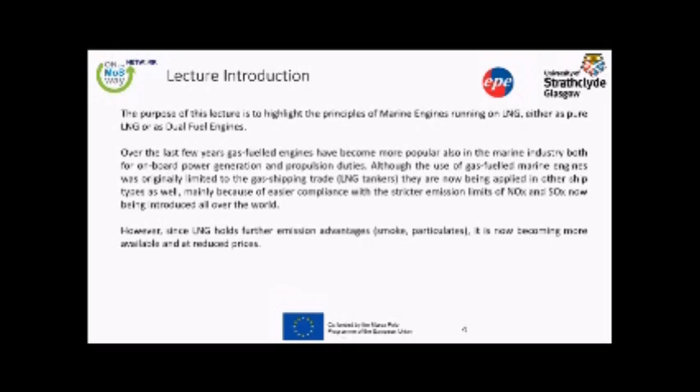A very brief introduction in LNG. I'm not going to repeat the basics of LNG that were presented in the previous lectures and also today by Ms. Damianidou. I'm going to focus on what LNG is, how it performs within the engine cycle, and how it is to be used as marine fuel.

Everybody knows that LNG stands for liquefied natural gas. It's a natural gas that is cooled down to approximately minus 163 degrees at atmospheric pressure, and it is transported as a liquid in order to achieve economy of scale and easiness to transport the amount of LNG. It is now rapidly becoming a widely used engine fuel, in association with its growing popularity as an energy source worldwide.

Let's now discuss LNG on board. We assume everybody is familiar with how LNG is produced in the refineries and how it is transported. Whatever I'm going to say stands from the point that LNG is on board the vessel and ready to be directed to the engine.

There are two distinct ways of producing gas from LNG, depending on how it is extracted from the tanks: natural boil-off gas and forced boil-off gas. Natural boil-off gas means we are taking off the top of the LNG tanks above the liquid, and this gas is used as a burning fuel. This particular part of the LNG cargo has a high methane content and some nitrogen particles, giving a very high knocking resistance.

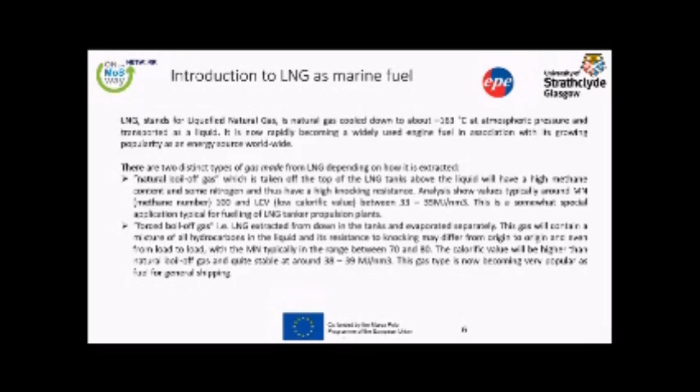The knocking stability of LNG as marine fuel: as we said, the natural boil-off gas from the top of the tanks is very high in methane and has good knocking stability. It is therefore particularly well suited as an engine fuel.

However, when a propulsion system is set up to use this type of gas, it is important to ensure that there is always enough natural boil-off gas with sufficiently high methane content available, so that there shouldn't be any need for mixing in forced boil-off gas from the bottom of the tanks. What does it mean? It means that in order to use boil-off gas, we need to have large capacities of this type of gas in order to avoid mixing with the liquid form of the gas.

This is the reason why we use this method on large LNG tankers, that are carrying huge amounts of LNG, and they do have plenty of boil-off gas quantities to be burned in their engines.

Engine installations that are specifically designed to be fueled by LNG should preferably use the forced boil-off type, with the LNG taken from deep down in the tanks and then well mixed before extraction into the evaporator. This methodology will ensure good homogeneity of the LNG taken out, and hence constant gas quality.

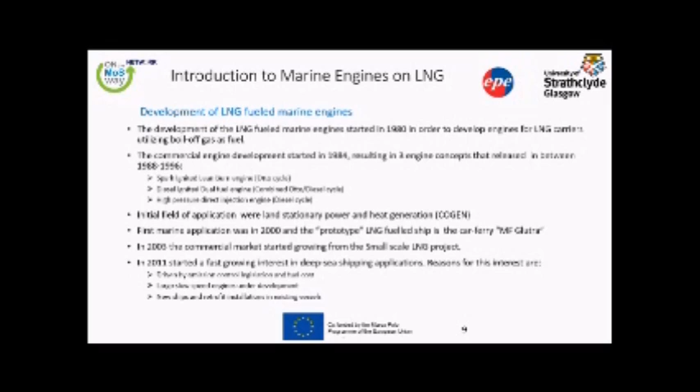So let's go into more detail, keeping this as an introduction, to the types of marine LNG engines previously identified. As described, three main types of LNG-burning engines are available to the marine industry, coming from different development directions and hence with some different characteristics.

The first type is the spark-ignited LNG-only engines, first developed for the land-based power industry, which has major requirements but also needs simplicity and good overall performance at lowest total emissions. These engines depend on permanent gas supply and initially came into the marine industry as engines for short distance ferries. The spark-ignited LNG-only engine should be applied only with LNG; we cannot use it with any other type of fuel.

The diesel-ignited gas engine with dual fuel capability was also originally developed for land power plants, and has the ability to operate both on liquid and gaseous fuels at high specific power, which is a particular advantage.

So I think we can continue with the description of the three types of marine LNG engines. We described the spark-ignited LNG-only engine, and now we are talking about the diesel-ignited gas engine.

This particular engine has a dual fuel capability. Initially, it was also developed for land power plant use, where its ability to operate both on liquid and gaseous fuels at high specific power was a particular advantage. Development was originally focused on low NOx emissions at high load; however, a focus is also on part load performance and variable speed capability. The diesel-ignited LNG engine is the first type to establish itself in the maritime industry and is currently the dominating engine type in this market.

The direct gas injection diesel gas engine is the third type of marine LNG engine, and initially came to use in the offshore industry, where its high flexibility and very high power density is of prime importance and attraction. The concept is unique, imposing no particular requirements on the self-ignition stability of the fuel gas, and its diesel operating principle ensures that the combustion of the gas fuel is very complete.

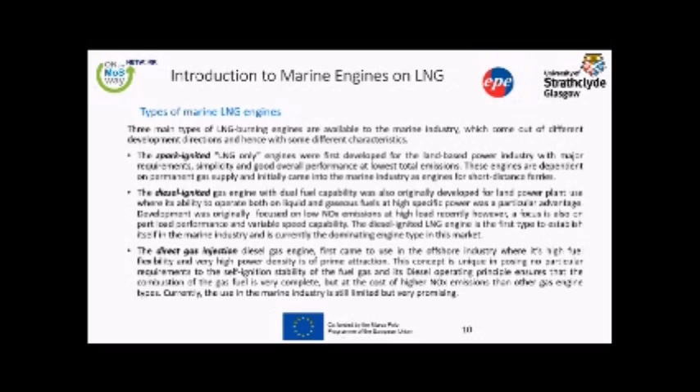The gas burning engines, regarding the principles, we have two different principles as stated: the premixed Otto and direct injected diesel cycles.

The Otto gas engines include the gas-only spark ignited engine and the diesel ignited gas engine. For the first one, we use either the typical well-known carburetor or port injection of gas. Those are single fuel engines, and therefore they must meet special redundancy requirements in order to be used on board vessels for marine applications in principle.

The diesel ignited gas engines have a conventional low pressure gas feed as above, but they have an ignition principle by injecting a certain quantity of diesel fuel, also known as Otto dual fuel, or low pressure dual fuel principle. This type of engine will always need a certain quantity of diesel fuel to be burned with the gas in order to run in gas mode.

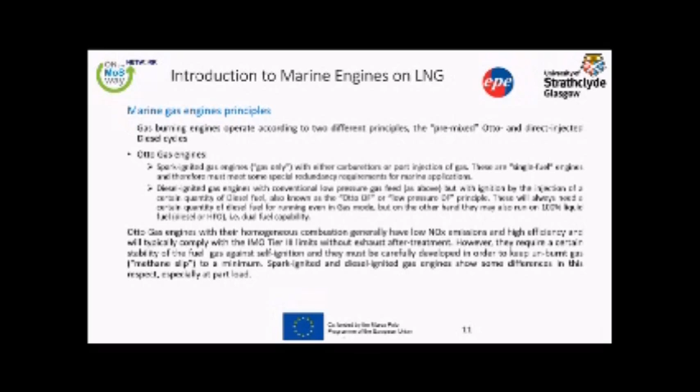The diesel gas engine is the engine where the gas is directly injected at high pressure into the cylinder after the diesel pilot fuel has ignited. We call this type of engine diesel because in principle it follows the diesel burning principle, that is, we spray fuel directly in the combustion chamber without any further spark ignition source. This is also known as the diesel dual fuel principle, or the gas diesel principle, and such engines also have dual fuel capability and may also run on 100% liquid fuel, either diesel or heavy fuel oil.

The diesel gas engines have a diffusion burning which ensures good capability of burning gases with low stability, that is a low methane number, and at the same time they are producing low methane slip emissions - we are avoiding the methane slip.

However, this type of engine does require a high pressure gas system, typically in the range of 250 to 300 bar, and we also need additional exhaust after treatment in order to comply with IMO Tier 3 NOx emission limits. So on one hand, we have a simpler methodology of burning the fuel. On the other hand, we need to establish on board a high-pressure LNG system that can treat the fuel before entering the engine, and we also need to take other measures in order to comply with IMO Tier 3 emission limits.

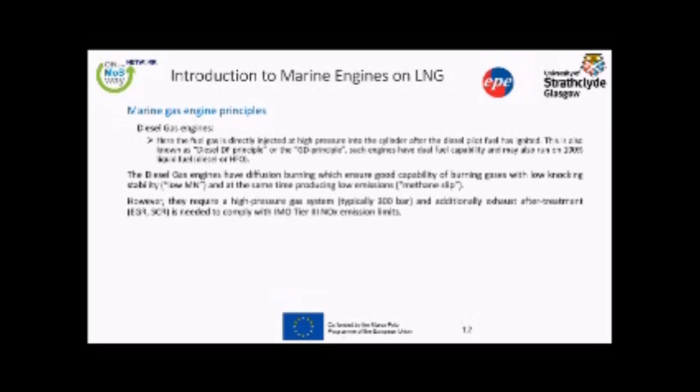Starting with a spark-ignited lean burn gas engine. Just for reminder, this is an LNG only use engine. No other fuel can be used on this type of engine. We are using low pressure gas supply in the region of 4 to 5 bar, no more.

This engine can display a higher efficiency at high load, higher than the corresponding diesel type of engine, but the ability to take partial loads is lower than the other type of engines. We do have low emissions that they can meet Tier 3, IMO Tier 3. They are very sensitive to gas quality. We need gas with a high methane number, and we need a constant supply of this gas.

Otherwise, the engine may present some hiccups in operation. This type of engine is not suitable for retrofitting of any existing engines. We are talking only about new engines, not about retrofitting engines with this type of gas burning principle.

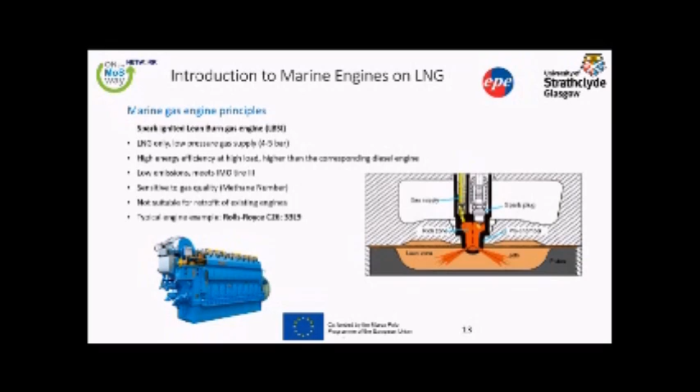The second type of Otto principle engine is the diesel-ignited dual-fuel engine. In this particular engine, as already stated, we have a dual-fuel capability, LNG and any type of diesel fuel. We have again a low gas pressure supply between 4 to 5 bars. This engine also presents a high energy efficiency at high load, and on top of that, it can display a better ability to undertake partial loads than the LNG only fuel engine, the spark type of engine.

It can meet the IMO Tier 3 emissions. There's a flexibility in fuel mix. We can design the engine with a design point according to our needs. We have no strict limitations on that.

It is also sensitive to gas quality, to methane number, but not as sensitive as the previous type of engine. It is a good opportunity and a good selection to retrofit existing engines with this principle, but please bear in mind that this displays an extensive rebuild of the engine, and this will be explained better tomorrow and the day after tomorrow by Wärtsilä and MAN.

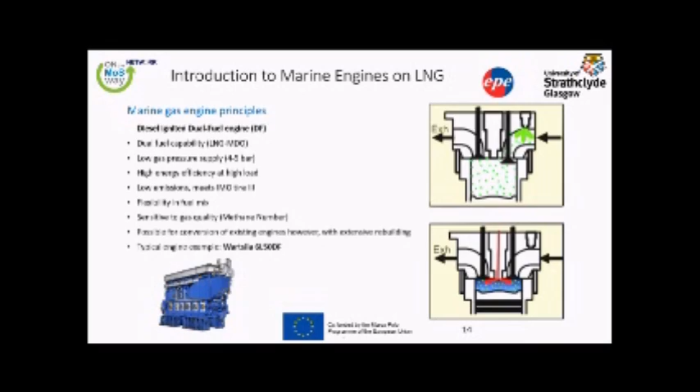For those two types of engines, just for clarification, I repeat that these type of engines are described as Otto cycle engines. That is for the lean burn combustion and the dual fuel. You can see a typical burning diagram where in the horizontal axis we have the air-fuel ratio, and in the vertical axis we have the mean indicated effective pressure, the thermal efficiency, and the NOx emissions.

You can see that we can select the design point as the optimum performance for all cylinders, well away from the knocking and the misfiring area of the fuel, and within the operating window we can achieve very low NOx emissions, almost insignificant amounts. A typical air-fuel ratio for this type of engine stands between 2.1 and 2.3. And you can see that the efficiency is well within the operating window, well situated within it.

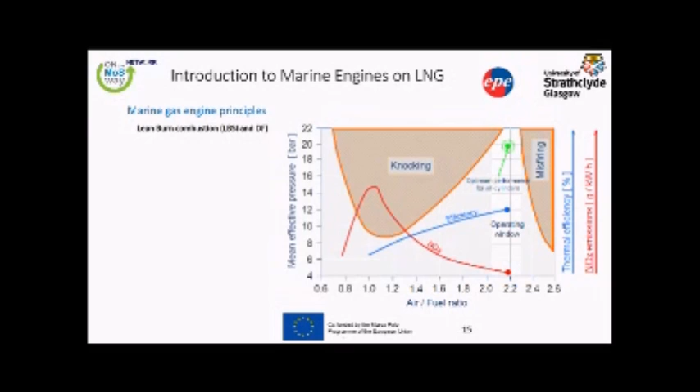The other type of engine is the direct gas injection. The direct gas injection is a high pressure engine. It uses the diesel principle, and in this case we don't have any spark source. We are using gas in high pressure, that is between 250 to 300 or even 350 bar, depending on the manufacturer. We can use this type of burning in both 4-stroke and 2-stroke engines. We can also have a multi-fuel capability, LNG and other type of marine fuel engines.

However, we cannot meet the IMO Tier 3 emissions. That's why we need additional reduction techniques regarding NOx emissions. This type of engine is not very sensitive to gas quality. We can use an LNG that has a lower methane number than the previous engines.

We do need onboard separate and dedicated installations in order to pump and compress the LNG to 350 bar and evaporate it in these conditions. It's not a big deal, it's a simple process. However, we do need a dedicated area on board the vessel, and this should be taken into consideration while designing such systems. This engine has also flexibility in fuel mix, and we are talking about retrofitting existing engines with this principle, and the retrofitting is a simpler conversion than the diesel ignition engine, and this is also attractive for deep sea shipping.

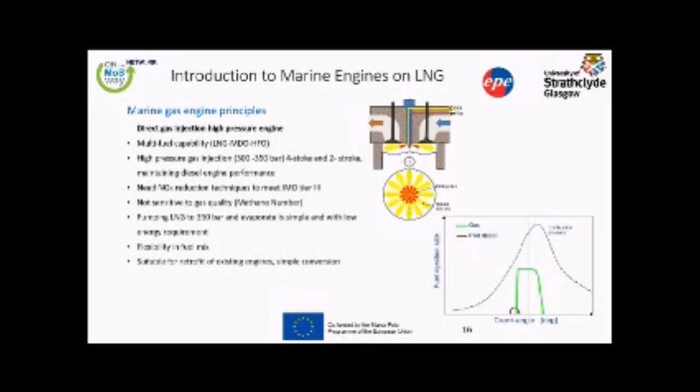Coming back to what has been described before, the deep sea shipping and marine industry is now starting to look at LNG applications, taking into account that the majority of deep sea vessels use two-stroke engines. This type of LNG-burning engine seems quite attractive to ship owners. A typical example is the big engine from MAN Diesel, the ME-GI models, ranging from G40 to G95. The G95 is a huge engine specially designed for very large crude carriers, developing very high power from a single engine.

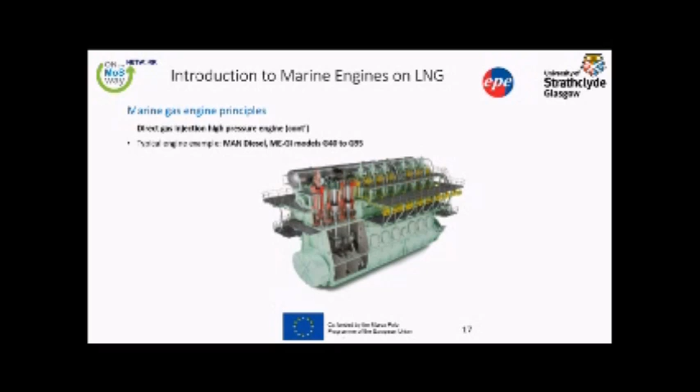More details will be displayed by MAN during their dedicated presentation. In these slides, I have gathered all three different operated engines in one picture for your convenience.

Let's start with the lean burn spark ignited engine. Again, it is LNG only, and it works like the typical gas engine in our cars. The gas enters the combustion chamber, the piston compresses the gas, and then we have an ignition source in the form of a spark, followed by ignition, and the cycle continues with the piston and the gas exhaust.

The dual fuel gas engine, operating under the Otto principle, is a little bit different. We again have the entrance of gas into the chamber, and compression of the gas. During compression to the upper limit point, for those who know the mechanical principles, we have injection of fuel, and the role of the spark is played by the fuel, the normal fuel, and then we have ignition of the gas.

The third type of engine, the pure diesel engine, uses high pressure gas injection. That is, we inject gas at very high pressure and burn it the typical way. Everything in the fuel is being burned within the two-cycle engines.

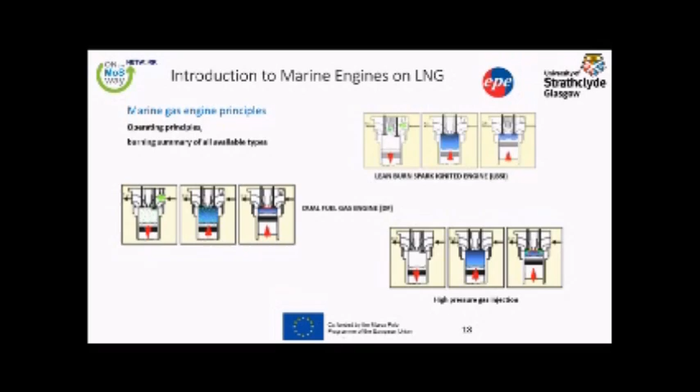So after finishing this, and just to repeat, I want to make it quite clear: this was just an introduction to the methodology, design, and types of marine engines available for running on LNG. We are going to have two full days with the major engine manufacturers, Wärtsilä and MAN, and they will address every single point regarding the technology of these engines. So this was just an introduction for you to have an initial picture, and in order for you to be able to follow tomorrow and the day after tomorrow what is going on.

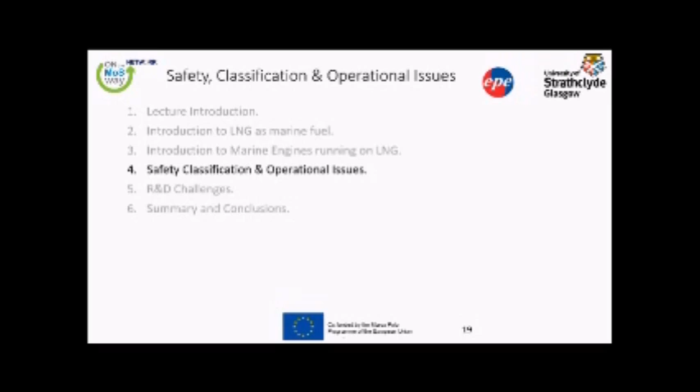Let's go now to some safety, classification, and operational issues evolving around the engines. Classification issues - of course, as you may understand, this is a very large topic, and we can make only some general statements in this lecture. First of all, let's see what IMO is doing, because IMO is formulating the principles that we are going to revolve around regarding LNG.

IMO has developed the IGF, the International Gas Fuel Code, which is based on the interim guideline MSC 285 of 2009. The latest news is that IMO finally concluded on the final draft, which was released in June this year, and it is expected to come into full force in January 2017, about a year from now.

The IGF is a standalone code, not part of SOLAS or any other legislation, and this code addresses all technical issues regarding the use of LNG on board as fuel, not as cargo. This is very important for you to clarify - IGF deals with LNG as fuel, not LNG as cargo.

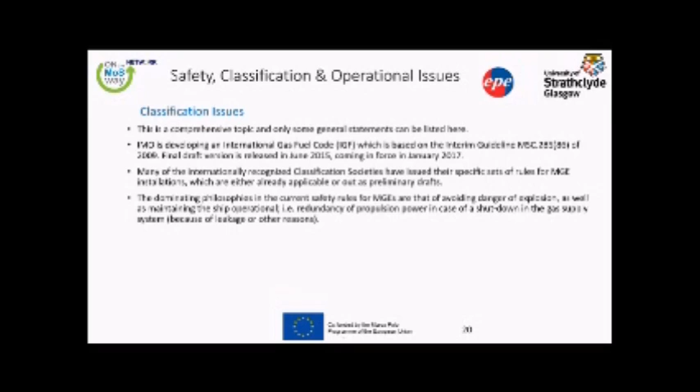Safety issues - again, we have a lot of points for discussion here. The IGF and the Classification Society's guidelines are addressing all the issues applicable at the moment. And from my experience, I can tell you that we are constantly adding new points for further consideration regarding safety and proper design.

However, if we focus now on the engine room itself, and let's say we don't care for the moment about other LNG applications on board, if we limit our interest to the engine room, when designing the engine room for a dual fuel installation, we need to address a couple of issues. The first of these issues is how to prevent any kind of explosion.

In order to establish explosion prevention, we use 2 main options. Either we should have a double-wall gas feed piping to the engines, and this type of piping should be provided with venting of the space between the inner and outer pipe walls to a gas detection system in order to be alarmed in case of leakage,

or place the engines in a separate gas-tight and ventilated engine room, which has its own gas supply, required number of air exchanges per hour, is well protected with gas sensors, and has required pressure relief and escape ducting, and all the other measures already addressed in the IGF or in the class society's guidelines.

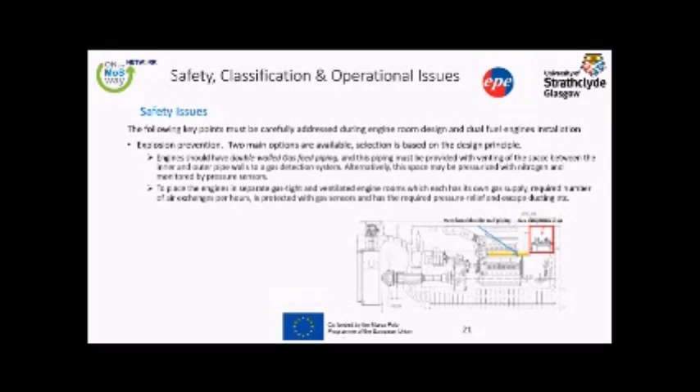A second point regarding safety issues is, of course, to use electrical equipment categorized as Ex-proof for obvious reasons, to design a dedicated ventilation system just for the LNG installation, equipped with a separate emergency relief system, and this ventilation system must be truly dedicated to LNG and must not connect with any other ventilating system on board the vessel.

We need to design the LNG bunker station according to IGF and class rules. There are certain requirements about this area now, from the required floor area that we need to have, up to ventilation, fire protection, airlock accessibility, etc.

Of course, we need to either reinforce or create additional firefighting and life-saving measures on board regarding the areas where the LNG is being used as a storing facility, or the LNG piping system that runs within the spaces. And of course, we need dedicated escape ways from any LNG designated area, preferably in opposite directions.

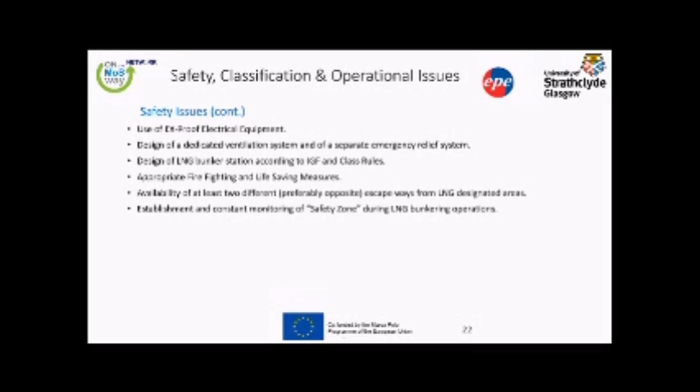Operating wise, the engine that runs on LNG must meet all relevant class and IACS rules regarding the design.

Now, the next point is not very well addressed at the moment, but we need to take that into consideration. If we have an engine that runs on LNG as a marine drive, not as a generator, we need to consider the variable speed requirements. And this is also important because of the transient load capability of the gas engine.

Because, as you may know, during the operation of the ship, marine engines are not running constantly at the design point, but also running on partial load. And although this is well executed when using typical fuel, this is still to be addressed while using LNG.

LNG does not stand that well at the moment as a fuel regarding partial loads. So far we have recorded the following capabilities of the three types of engines already addressed: the direct injected gas engine,

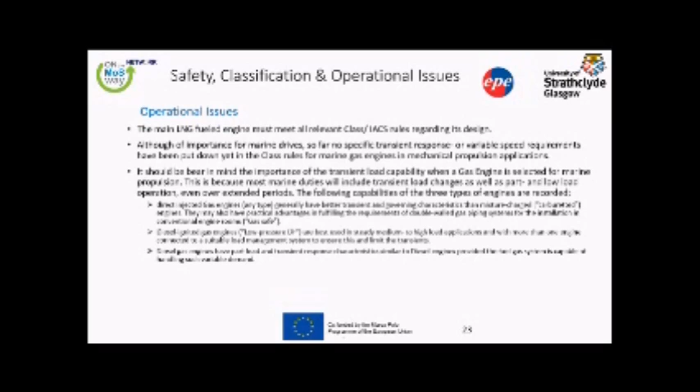Speaking about R&D, let's see what the R&D challenges are regarding this type of engines. We have three fields of R&D challenges. The first field is the engine and system itself. As already stated, we have part load efficiency optimization, which is still to provide a better solution.

We have methane slip reduction, and this is also a headache for the engine manufacturer because we are losing some LNG out of the burning cycle. We have to establish how to ensure fuel gas quality, which is essential for these engines—they are very sensitive to the quality of the fuel in principle. And of course, we need to see how to reduce the production cost of LNG.

Regarding fuel handling and storage, we need to find better storage tank solutions regarding space on board and cost. We need to improve the fuel handling systems and the bunkering logistics, and find out simpler and more robust fuel system designs without reducing safety, space, and cost.

Finally, the commercial challenge is how to create economy of scale regarding LNG. This is a huge topic by itself. We need more actors in the market, and this is out of the reach of this lecture—it's just for presenting the challenge in the commercial part.

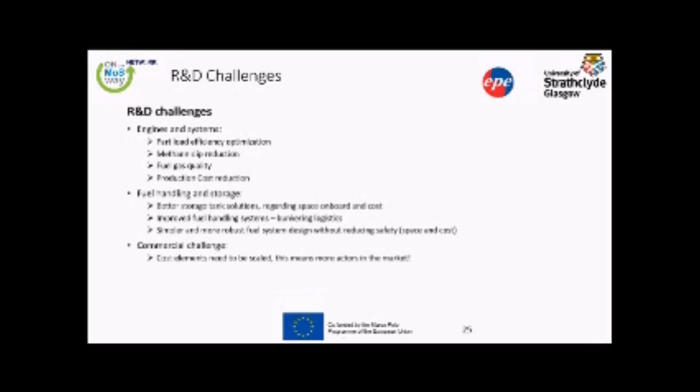Finally, some summary and conclusions. The conclusion so far is that LNG is considered to be the most promising alternative marine fuel. Using LNG as marine fuel results in very low exhaust emissions. LNG is available worldwide in large scale, and it can be further distributed to the small scale fuel market.

We can display proven engine technologies for medium speed natural gas engines and some slow speed two-stroke engines. We are still developing this field. We're pretty sure that we will have very good engines in the very next years regarding two-stroke engines.

We have an energy efficiency in theory equal or even better by using LNG. The challenge is to create an engine that uses this energy efficiency in a better way than marine diesel fuel and heavy fuel.

Of course, LNG fueled engines are more environmentally friendly and can meet the strict emission requirements. The engine R&D challenges are well addressed and are related to part load efficiency and other issues like methane slip and variable gas composition.